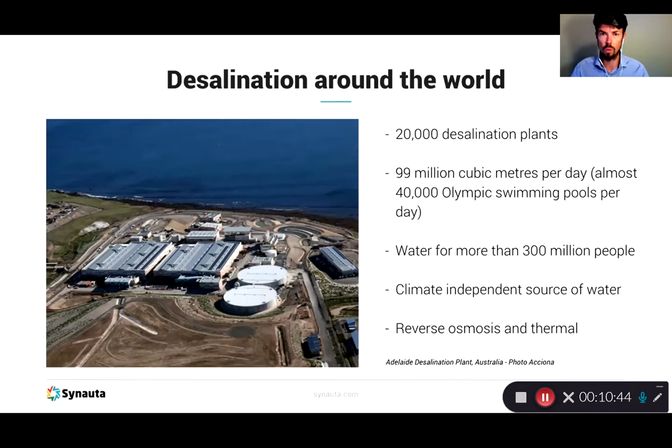There's a couple of different types of desalination, you're probably well aware of this: reverse osmosis and thermal desalination. During starting up Synauta, we looked at how we would optimize both kinds of systems. And given that over 90% of the world's desalination is done using reverse osmosis, we decided we'd focus our efforts on reverse osmosis, and later down the track we might come back to thermal plants.

So what's reverse osmosis all about? Of course, we all know well, it's a salt removal technique. It's well applicable to seawater and brackish water. Today I'm mostly going to be talking about seawater technology, but down the track we'll probably be able to come back and tell you more about our brackish water applicable technologies.

The really key thing for our business is that energy use on a seawater plant can comprise more than 50% of a desalination plant's operating or OPEX costs. We took this figure directly from GHD, the Australian engineers, and actually in some cases it can be as high as 60%. So this was our theory when putting the business together: if we can save energy on the reverse osmosis stage, then we're probably doing a very good job for the entire plant as well.

In the past, technologies have come to the fore that have helped improve the energy efficiency of desalination. Even since the very early days of reverse osmosis, there's always been new technologies aiming to save energy in the field. And of a couple that are noteworthy, I think the biggest impact of any technology in seawater desalination was energy recovery devices. And particularly the most successful has been Energy Recovery Inc., the company out of California, where they're based now. They make up more than 80% of the market when it comes to energy recovery devices.

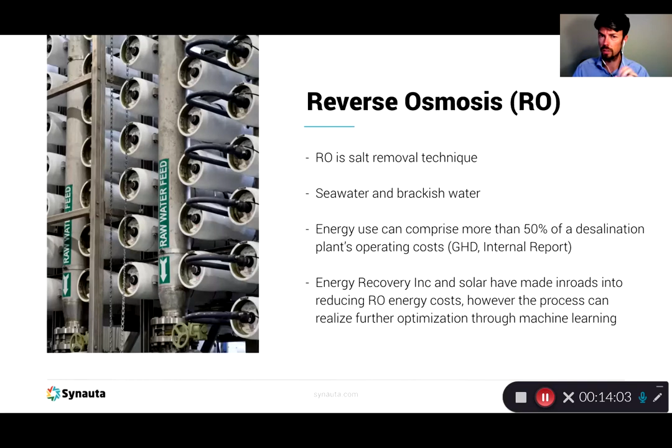Of course, another technology that was great was Nano H2O, the company that I was working for in California. We did a great job there of lowering the energy in desalination as well by as much as 20% in some cases. That 8 to 10% kind of range was a usual figure for us at Nano H2O. And we really saw some great success around the industry there as well. So again, that's what got me thinking about, well, how can we use machine learning to really improve energy use?

So the problem that we're trying to deal with here is that operators of desalination plants have some really important things they have to deal with on a day-to-day basis. The first most important thing is making sure enough volume of water flows from the plant. So they have an order of water coming from the city or the end user of the water, and they have to meet certain targets.

In addition to that, they have to meet the water quality targets. So how salty is the water, and is that below a certain range? They might have boron in the water as well. That's a target that they need to make. So operators of the plant are usually thinking about those two things and making sure everything is shipshape at the plant. And on a day-to-day basis, they might not get time to think about optimization. Some do, but a lot run into scenarios where things happen on plant and they have to go fix it.

So let's go through a usual day for a typical operator. So they might come in the morning and they make themselves a coffee and they sit down at the controls and they say, oh, there's an alarm going off. So I have to look after the amount of water the plant is producing. So I better go out and fix that thing. And so they fix the thing and they come back and now they sit back down at the controls and, okay, there's another 10 more alarms or even more alarms than that.

And so they spend a lot of their time dealing with these alarms and have very little time to sit down and say, okay, I've got to focus now on doing a whole heap of maths and I've got to do some assumptions here to say, all right, I can optimize the plant. So usually it's very rare that they get around to doing a lot of optimizations to the kind of level that we can do with Synauta.

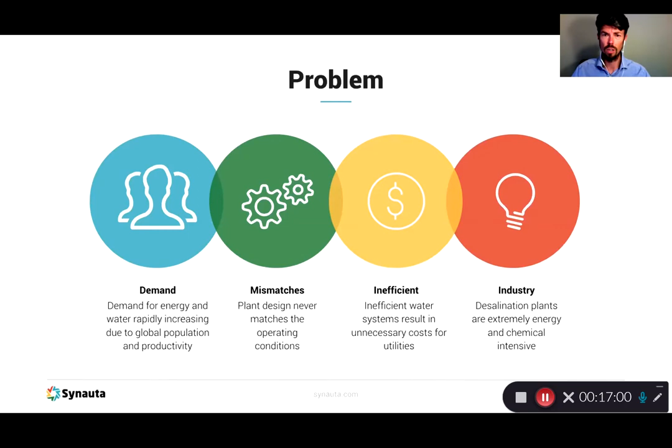So here at Synauta, we've thought about what are the real easy ways that we can help the operator out and not cost them too much time because they're really busy doing other things. So we've created this set of machine learning algorithms that can really help save energy on site. We're also working on some chemical algorithms, but today I'm mostly going to focus on the energy part.

So our software is really, really simple to use. We don't have a front end or anything like that. We spoke to quite a lot of operators and worked out what tools they are really comfortable with. So rather than introducing a new software, we know every operator knows how to use their SCADA system and every operator knows how to use email. So simply our software produces a set of set points for the plant and we email that to the operator.

So we work in a couple of phases. I'll explain that in a moment. But in that getting ready phase, the operators see that email, check the set points, and then manually enter that into the SCADA system. And if after a while they're really happy with that, then we work on upgrading that to be integrated into the SCADA system.

So that was our focus on making the software really, really easy to use and not having a huge learning curve or too much training involved with putting things together. And of course, it needs to be really secure as well. So we've designed with security in mind and used tools that were as safe as possible.

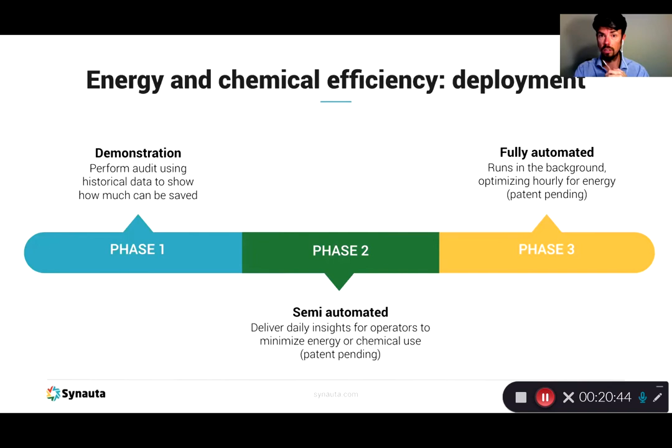If everybody is happy with that and the system is working really well, then we move into the fully automated mode. So this is when we connect to the SCADA system, and it runs then in the background and no one has to think about it too much. The operators might get a button that says, okay, I'd like to use those set points. But otherwise, the operator then has not too much that they have to do other than look over its shoulder and make sure everything is going in the right direction.

So given that a lot of us today are researchers or had been researchers in the past, one of the dreams of many researchers is starting a startup and taking the technology that they've spent blood, sweat and tears putting together to make work and building that into a company. So I've been really fortunate that I was able to learn a lot about startups during my time at NanoH2O in California, and really learn what makes a startup successful.

You might have seen in the bio that Sean gave, I've also worked in multiple accelerator companies. So these are companies that help startups get up and going. So when I was working at WaterNext, we helped about 30 different startups in the different phases that they were in to commercialize their technology.

So here's a little bit about Synauta's story and how we got started. So when I was working at NanoH2O, I was an applications engineering manager, and it meant I got to look at a lot of data from desalination plants from all around the world. And whenever I looked at the data, every time I would say, I really think this plant could be optimized just a little bit here and a little bit there. And I bet if they tweak things just that little bit, they could save 5 or 10% of the energy use on site. Or if they use their chemical routine a little bit differently, then they could make their membranes last longer. And so I thought about this for a couple of years.

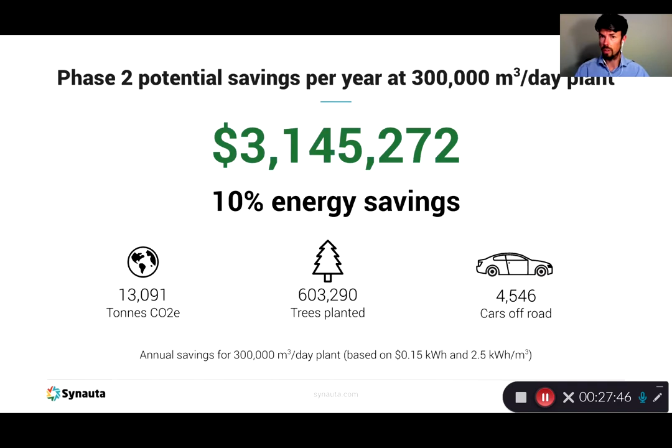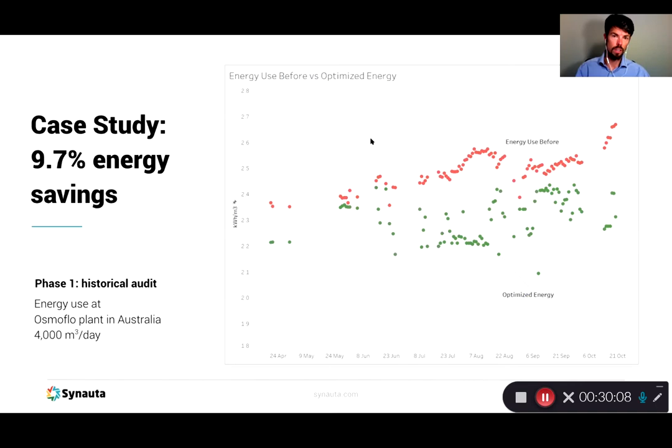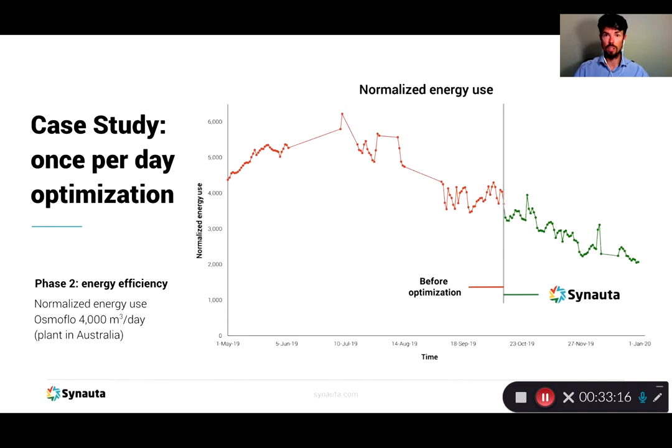So I want to tell you a little bit more about our technology and the machine learning part, not too much more, and then I'm going to leave plenty of time for questions. But essentially, there's three parts to our product architecture when it comes to the technology. We have the machine learning part. So that's the part that learns the history and behavior of the RO membranes and what happens over time. And then there's an optimization part that takes that history and creates the set points for us.

And we also added standard mathematics to the equation. So over a lot of experimentation, we found in some scenarios, a prediction is better using a standard mathematical approach, exactly what you would read in the reverse osmosis manuals of the manufacturers. And in other cases, the machine learning was better. So it took a little bit of time to figure that out, but we've now got that buttoned down and to have a system that's really a hybrid between using mathematics and using machine learning, and that gets us fantastic results.

Another major part of things is how we actually deploy that. So it's all well and good to have this machine learning technology, but you need a delivery system and a data pipeline to be able to accept data in quite a chaotic state from some parts, and process that data, turn it around, put it into the machine learning, train the model, and then produce results out the other end and send it back. So that data pipeline takes quite a lot of effort to develop. And our approach was to use microservices that are all linked together and communicated using a hub to be able to talk between those pieces. So I won't go into too much detail on the deployment now, but let's talk a little bit more about the products.

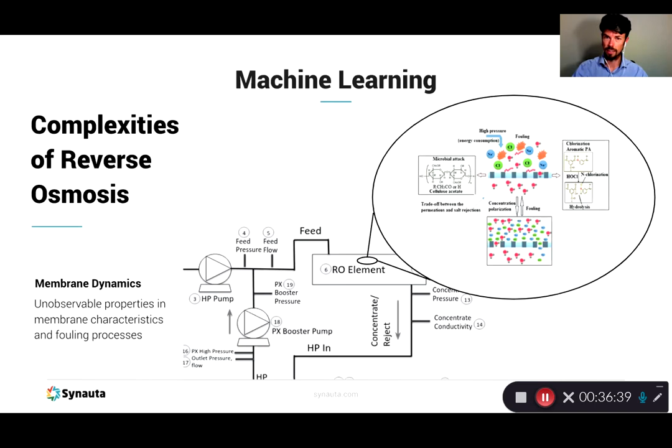The real complexity that comes is that the internal workings of a reverse osmosis element, the actual membrane itself, is extremely complicated. I'm sure there's a lot of people on the webinar today who are working with fouling mechanisms of reverse osmosis and other membranes. It can be really complicated as to what is going on. So fortunately, this is where the machine learning really helps out. It learns what is going on with a minimum amount of data and puts things together that a human operator or application engineer, or even us as experts in the field, really have trouble working out. So that's fantastic. That removes that thought piece for us and simplifies things in a lot better way. So those membrane dynamics are the key thing that's going on under the hood of the machine learning.

Another complexity here, and this is really where human operators would have a huge amount of trouble, is optimizing multiple trains at once. So I thought about how long it might take me to optimize just one train, and it could take, as an engineer on site, maybe a week or so of working through calculations to get things just right and be confident that I'm going to save energy rather than cost the plant energy. And so let's think about a site. Let's use Adelaide again. Over exactly 20 first pass racks on that Adelaide plant. So think about having to do that for all of those 20 racks at one time.

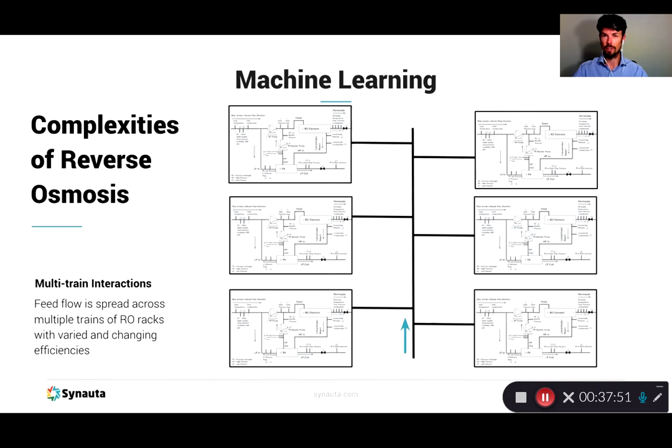So our machine learning is able to take each one of those racks and think about what are the best flows precisely to set on each rack. And so how, by sharing the load around between the racks on site, how can we maximize energy savings yet again on top of the system that we use for just one rack as well. So that is testing very, very well in a location overseas. So doing very well there too. So breaking down what's going on with the machine learning a bit more precisely, the neural network is the system that we use, and we have a whole heap of inputs and a whole heap of outputs.

So to break it down, inputs are things like feed water temperature, feed water conductivity. There's a whole heap of others. We just looked at a process flow diagram before of a few things. We also make some calculations, and that's a little bit of where the secret sauce is. And then we have decision variables.

So what are our flows out the other end? Typically we want to see what's the permeate flow and feed flow. Here we've got the concentrate flow, those things. There's a mass balance going on there, so we need to know 2 of those 3 flows. And then the neural network is trained by our machine learning experts. We get all those pieces in place just right, and there's a lot of fine tuning that goes on there for particular plants as well.

And then we have outcome variables as well. So this, on an energy saving machine learning, is how much energy is used and how do we minimize that. We want to know that we're hitting a maximum permeate conductivity and not going over. And we want to make sure we're making the right flow for the plant as well and not over pressurizing the system either. So that's a little bit more detail, not too much more under the hood, but a little bit to whet your appetite.

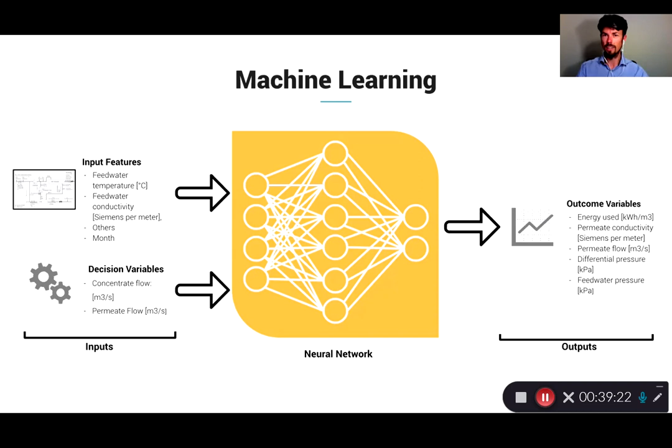The standard math approach, as I mentioned before, is really, really important. Machine learning has this habit of doing whatever it wants to within a certain context. And so by adding more of the standard math, it helped it train and do things within the laws of physics. So, oh yeah, physics are important. That really, really helped things. If you don't put in a physics approach, then it doesn't understand things like the limitations of pumps and the limitations on flux in membranes, those kind of things. So that was an important piece too.

On a daily basis for the plants that we work with, we create something similar to this, a cost function, looking at where is the lowest cost and thus the lowest energy for a certain feed flow and concentrate flow. So just a little bit more to show you what goes on.

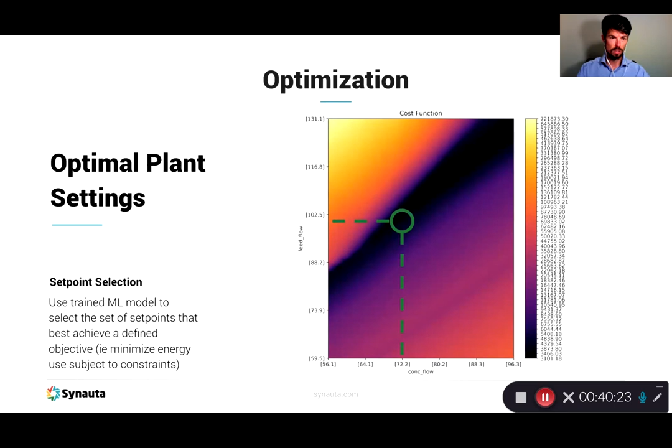More on what's coming down the pipeline. Very soon we'll have that SCADA implementation underway, and we use an application programming interface or API to be able to connect to a SCADA system. We're looking more on the chemical saving side. We released our first case study, and that's really what I told you about today. That has given us fantastic inroads to the market, and we're seeing really good uptake within customers around the world. So over the next 6 months, we'll continue to work with customers in Europe, the Middle East, Australia and Canada, and really prove out our technology with them.

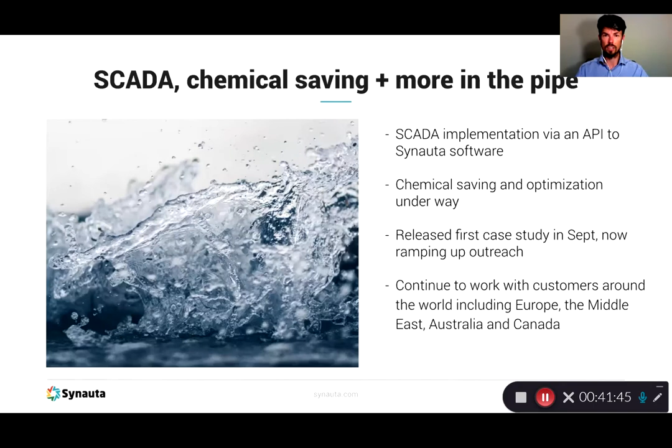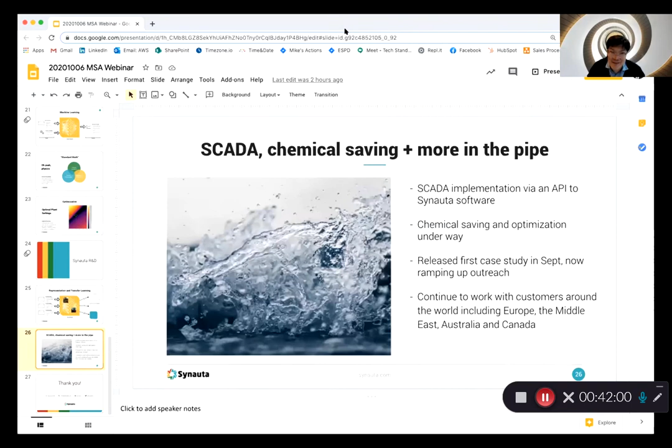Thank you, Michael. This is a very great presentation and a lot of inspiration, how you got the idea for desalination and how to save energy, and you collaborated with the machine learning guy and combined them together. Another very important point is you created the startup in Canada. Now it looks like your machine learning software works very well. Very good presentation. So we got several questions from your presentation.

The first question is not really a technical question. It's from Jeremy, who's from Calgary, and he's curious why Calgary was chosen as the place for Synauta to start up. Are there any challenges being in Alberta given its struggle to transition and its lukewarm reception to the tech sector? He's wondering why you selected Calgary and Canadian funding to develop this kind of new idea. You have experience in Australia, the US, and then you have your company in Canada. It's a very interesting story. So can you please share why it happened, and what's the best way to make a startup if our members try to make a startup like you?